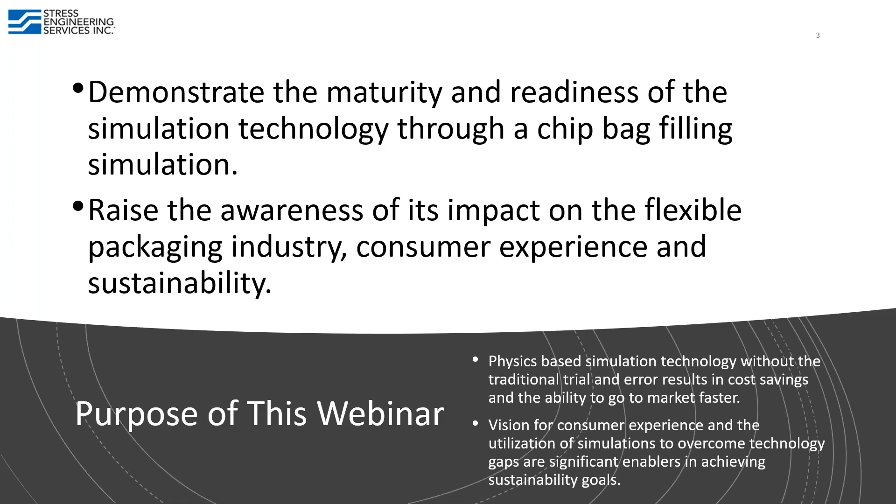Physics-based simulation technology, without the traditional trial and error, results in cost savings and the ability to go to market faster. In addition, vision for consumer experience and utilization of simulation to overcome technology gaps are significant enablers to achieve sustainability goals. Having this technology enabler in the development process is very important so we can achieve the goals we want. This is really the purpose of this webinar.

So what about this - we're talking about shipping less air, and why we even ship air. This is a survey of 14 recognized brand names, and those are chip bags on the screen. You can see the average air content in this bag is 43%. We do indeed ship air around by shipping the chips.

If you think about Pringles, technically it's not potato chips, and as you can see the Pringles are listed there. Even that pretty dense product, even though we can't call it potato chips, has 28% air.

When I read this article and understood what it was all about - it's about consumer satisfaction and things like that - but as an expert working in the packaging industry for 25 years, I was thinking: the shipping truck is half empty. We are indeed shipping air. What a waste of energy, right?

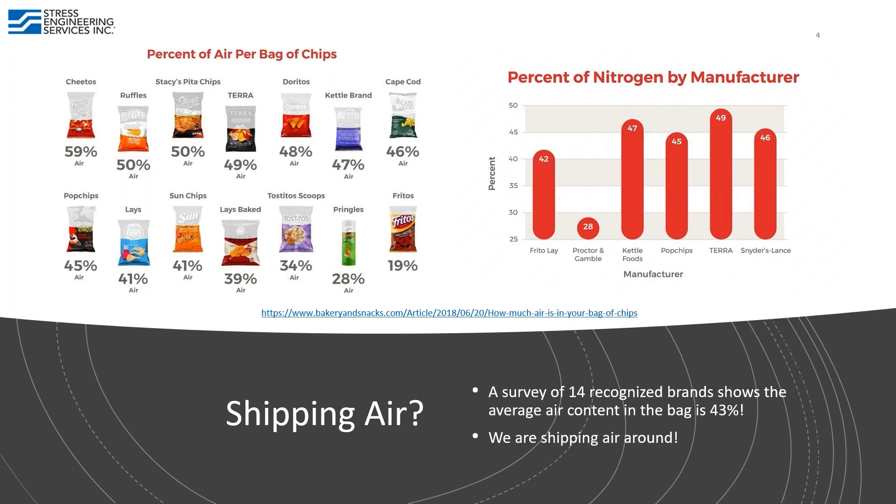Going forward - the article I mentioned on the previous slide is about consumer dissatisfaction and their perception of being cheated. Setting aside the validity of the claim, between 2016 and 2017 300 slack fill cases were filed as litigation. This is over a two-year span, '16 and '17. Slack fill meaning you don't fill the whole bag. This slack fill litigation can be really frustrating for business at that time.

For companies that find themselves on the wrong side of the slack fill litigation, the claim often boils down to: I thought there was more product in the package, even though the label said exactly what I was buying. So it's about consumer perception on this.

This was a big deal in 2016 and '17. As you can see in the picture on the left, social media showed half the bag empty, calling it false advertisement, and very disappointed customers. You don't want that associated with your brand, but it is happening.

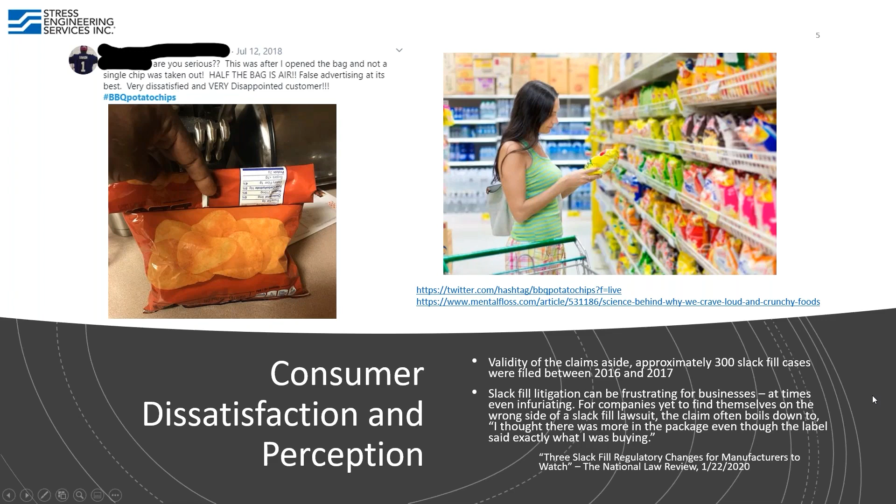From a business point of view, there's a lot of money to be saved. I did a quick research showing just the potato chips segment alone in the U.S. market in 2019 - 17 billion in revenue, just potato chips alone, not even other snacks. Companies typically spend on average 7 to 13%, so around 10% of total sales, on transportation. So that's 1.7 billion on transportation.

So if instead of shipping 50% air, we only ship 40% air, that's a 10% reduction in air content. A 10% reduction of 1.7 billion is $170 million. That's a lot of money to be saved. So by this pure simple calculation, not only for sustainability but for money savings for the brand owner, there's a lot of money to be saved.

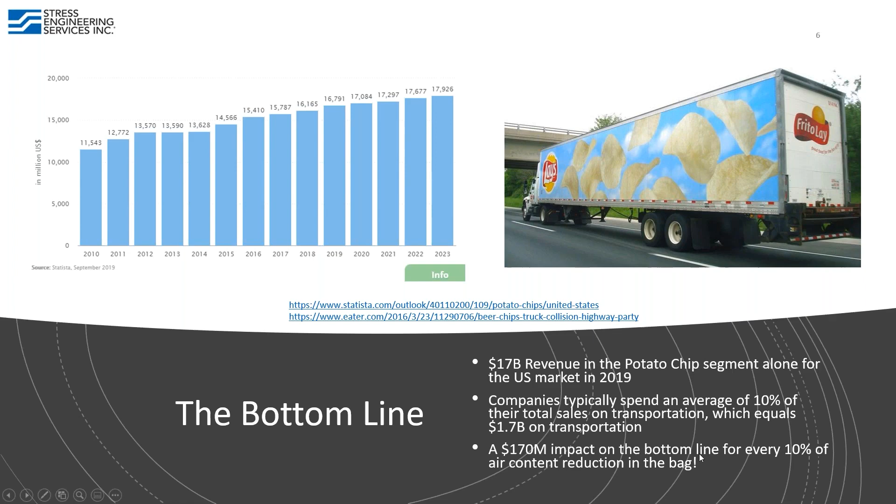Going forward in terms of the sustainability impact on those smaller bags, the additional research I've done includes a rough calculation on CO2 emissions from fuel usage. So if you think about it, every 10% of air content reduction in the bag translates to 170 million dollars in transportation savings.

15.2% of the transportation cost is petroleum, that's 8.9 million gallons of diesel. We're saying $2.90 per gallon, actually even more nowadays, though gasoline is cheaper. So the calculation translates to...

91,000 metric tons of CO2 emission. I was interviewed by Plastics Engineering magazine twice on this article. By the way, this article covered a similar topic I presented at the Plastics Society annual conference in March. They asked, what does 91,000 metric tons of CO2 actually mean? That was the article I did in December last year.

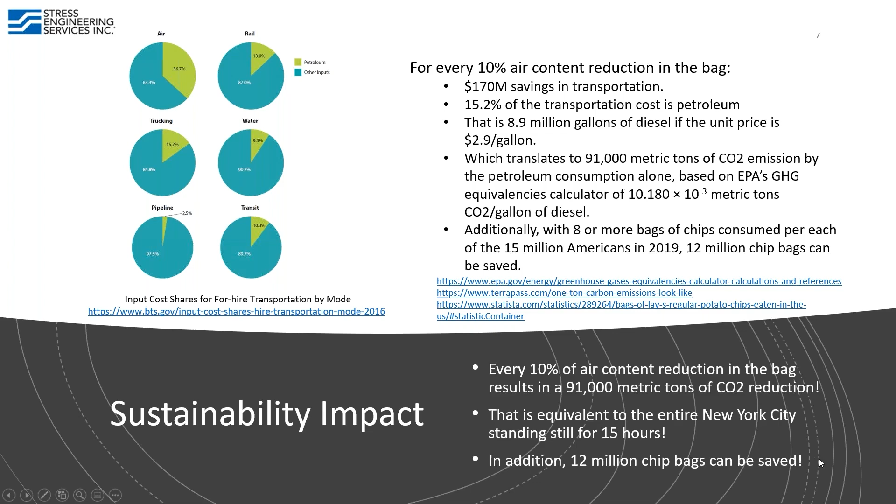This is the sustainability impact just from the 10% savings of the air. As packaging professionals, I presented this topic to the packaging professionals, and everybody in that room knew and said, this is why we need air content, we need that.

We ship air for reasons. For example, we need to flush out the oxygen with an inert gas using nitrogen to preserve the freshness of the chips. The bag needs to be large enough to avoid potential product contamination at the seal bar, because if it's too small, my heat seal can potentially crush my chips and compromise the seal. I also need that air for the pillow effect, to protect my fragile chips during transportation, and to prevent spilling when opening the bags.

Air in the bag is a good thing. As packaging professionals, we all know this is functional slack fill, it's needed. We all know that.

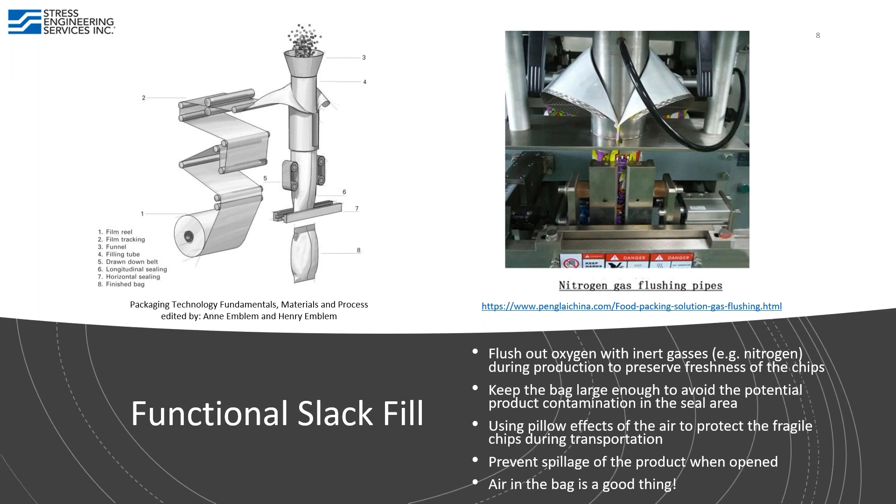However, is there room for less air? There's three things. One is consumer satisfaction, we clearly see the dissatisfaction of consumers. And second, we know the sustainability impact.

So we put more material, we ship a lot of empty bags. Basically on the shipping trucks, they cube out, meaning they're full but not weighed out, because they're full in volume. You see on the highway, those weigh stations prevent trucks from having too much weight. In this case, they're not weighed out because they're cubed out.

So they found that 50% of the trucks are air. This wastes a lot of energy. That's the sustainability part of it. And what we all know is we need that air for the packaging's functional performance.

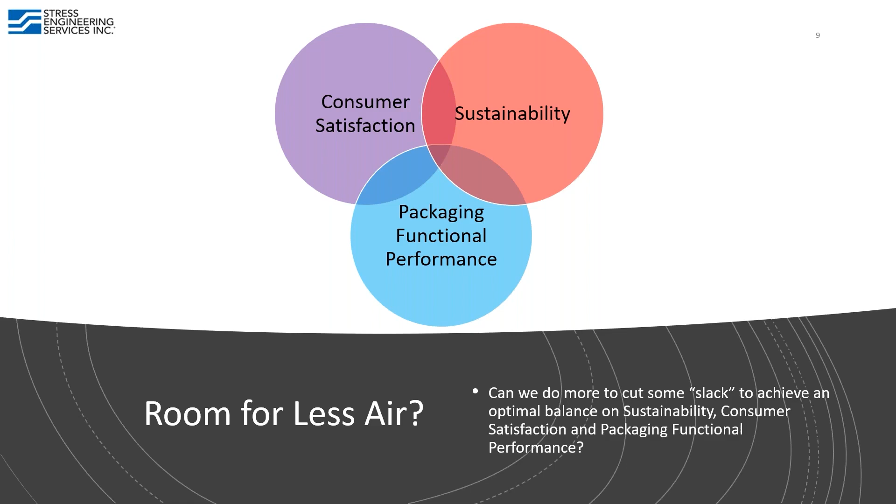Do we have a sweet spot? Can we do more to cut some slack to achieve an optimal balance on those three things: sustainability, consumer satisfaction, and packaging functional performance? Is there room for less air?

So we're talking about snack flexible packages on the market sold by weight. However, the volume of the chips is a function of the chip broken rate, chip size and distribution, bag width, bag film gauge material, and line speed, all that.

So the volume of all that is not a function of weight, it's a function of those other things. To determine the right volume with a given product weight is not trivial, and traditionally it's done by a trial and error process. To my best knowledge today, bag size is still determined just by lab testing.

What I saw with my own eyes, the engineers and lab technicians basically fill the bags into a plastic tube over and over again, and measure the height, then use historical data to determine the height. But because of the lack of accuracy, they have to put a larger safety factor, a larger bag. So due to concern of sealing contamination and issues with the bag being too small, those will be corrected during production, but that is costly over time, and more plastic films are used.

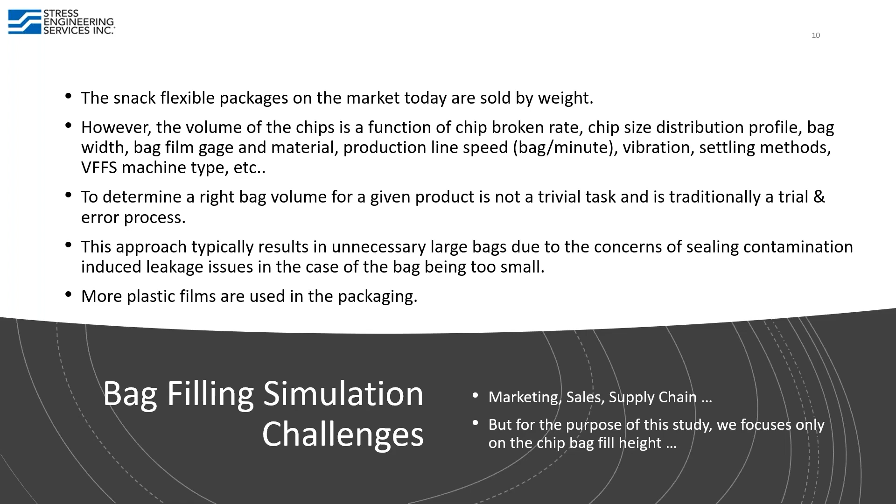So those are the issues and the real challenges. On this specific webinar, we'll focus on the chip bag fill height only, to demonstrate the power of the simulation technology. We'll try to determine the fill height and take the guesswork out of this whole equation by using computer modeling simulation.

This is what we call a digital twin of the actual bag filling process. With the technology itself, we try to demonstrate the digital twin is truly an identical twin, not a fraternal twin. So the technology is mature enough and ready enough.

We become an enabler to fast processing with the fast processing computer hardware nowadays, with expanded modeling simulation capability, and also with big data. Organizations, brand owners, and OEMs have already accumulated tremendous amounts of data, and this data can be used to validate and improve the accuracy of this modeling simulation.

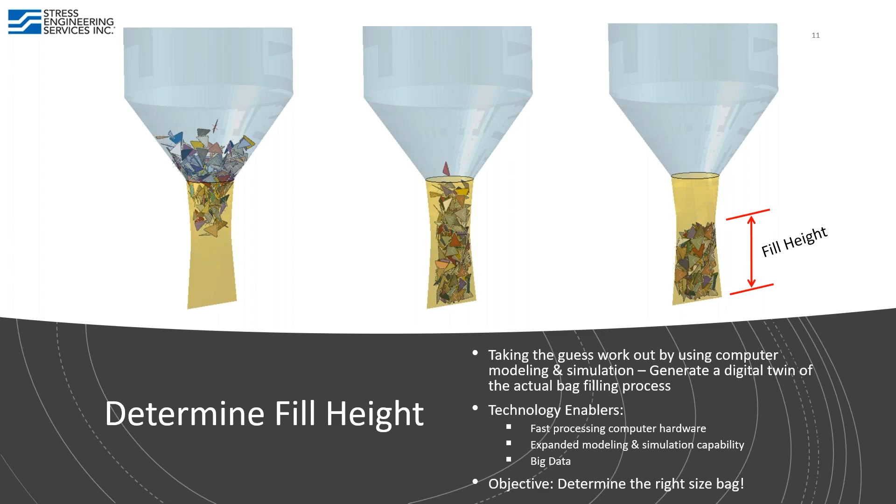So the study itself will try to demonstrate that we can determine the right bag size through modeling and simulation technology. Here's an example: three different cases are presented. The first is a rigid round tube, which engineers typically use, and sometimes they use a bag as well. They use the plastic tube on the left, showing the round tube.

So we simulate this lab process, filling the chips into that round plastic rigid tube, with 100% full chips - those are triangular chips, like pita chips. The second case will also have 100% full chips, but into a flexible bag that we made up, of 22 ounces, 9 inches by 15 inches in height.

The third case will mix in broken chips: 5% half chips, 3% third chips, and 2% sixth chips. An organization typically has this data, because from the manufacturing process, the baking process, and the conveyor lines, they know the distribution.

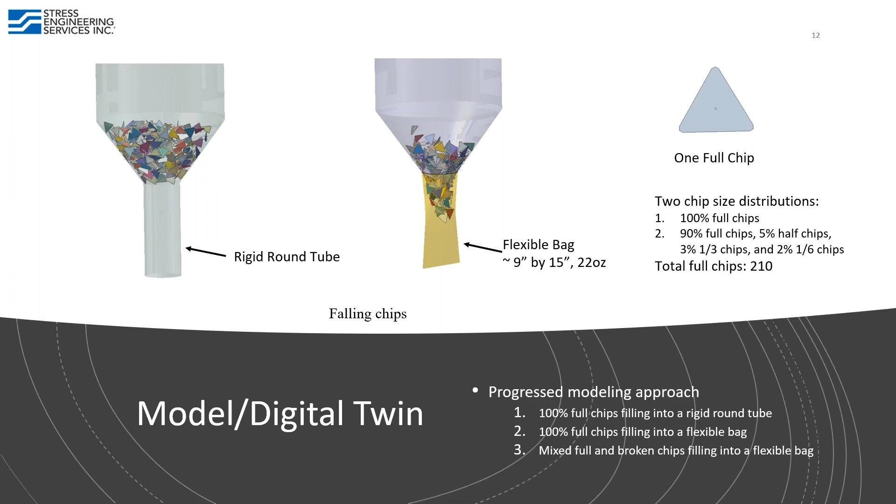Here's the animation showing filling into the plastic tube - this is a round tube, about 210 chips in the whole model. The same chips get randomized before they get into the hopper, and each time we run it the input is randomized. On the left is the animation, and we choose one of the animations. You kind of always have one chip lagging behind - it's interesting because it contacts the corner of the hopper.

On the right is showing the result - we did this 100 times differently, randomized. You can sort of see the normal distribution, with the average height at 4.19. This happens 21 to 22 times, and the highest gets to 4.85, about 3 times. We only ran 100 times, so this is just the distribution of the height. This is again 100% full chips with a round plastic tube, so the height is pretty low.

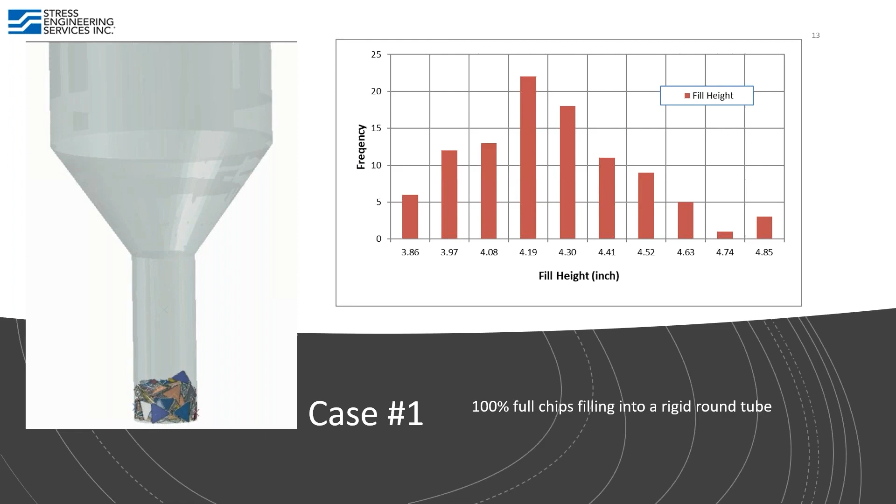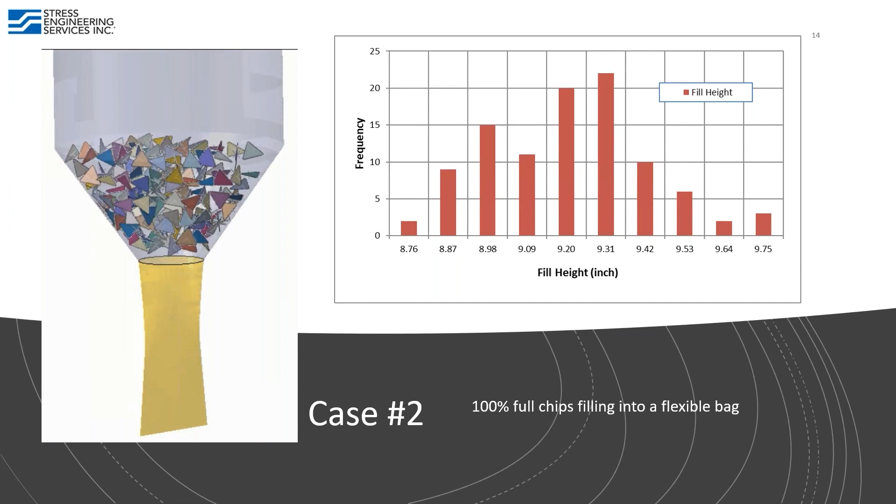Progressing to the next case, we still have 100% full chips, but now into the flexible bag. You can see 100 randomized filling runs, and the average is around 9.2 to 9.3. Your highest fill height is 9.75, and your lowest, which happens probably only twice out of 100 times, is 8.76.

The important thing here is that brand owners and OEMs are really interested in the highest fill height, because that will determine the bag size - at that point the seal bar is going to close, and they want to make sure the seal bar will not clamp onto the chip. So that 9.75 figure is very important to the brand owners in terms of determining the bag size.

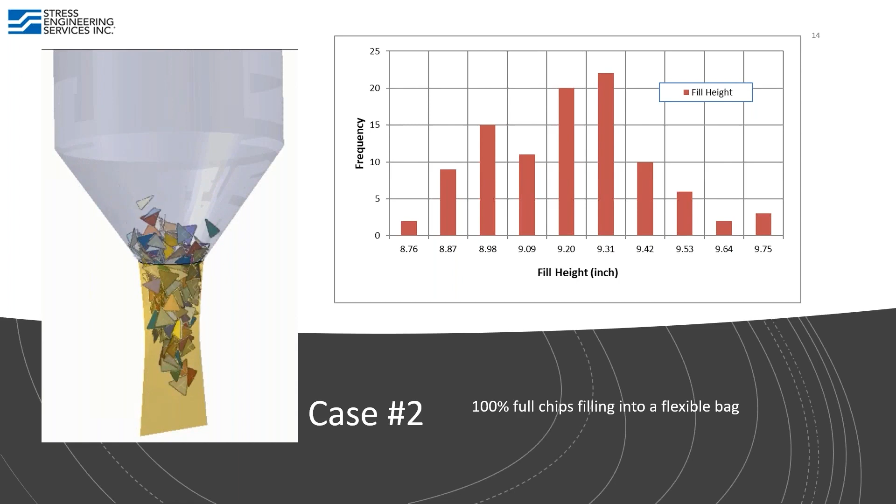Progress to case number 3. This time we added more complication. The bag is still the same, the hopper's still the same, but our chips are mixed, which is more close to reality: a mix of full and broken chips. In real life, there are also pitas that are curled, which we're not modeling here.

Notice that the height actually - in this case we were hoping the height is going to be reduced because the weight is the same. If you look at all three cases, the label has to satisfy the label claim for the brand owner, so the weight is the same. With broken chips you would expect lower fill height, but in this case my height actually increased. This is a surprise, but I think we may need to run more times.

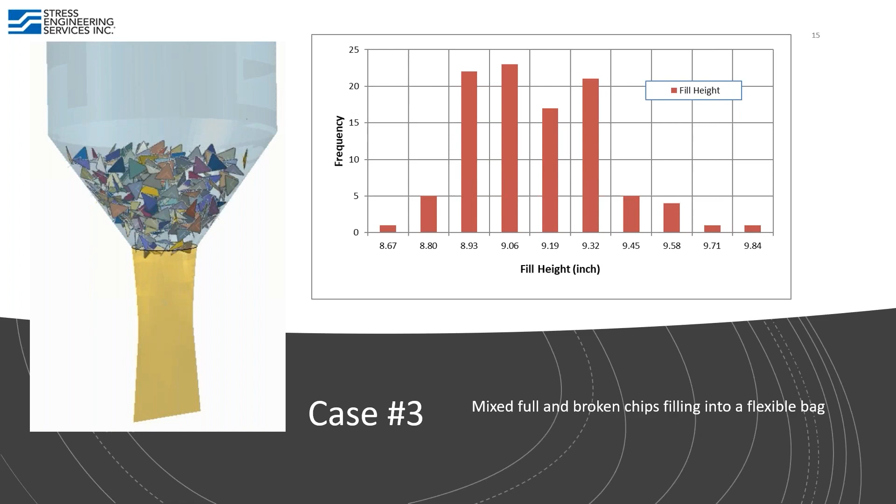This will only run 100 times, so we may need to run more times to really see the true distribution of it. But you see also in the nominal case, they are more concentrated in the middle.

The other thing we noticed is that in one case there's one chip falling behind. It takes longer time because of that transition - the hopper transition to the bag is a sharp transition, and I have a bag bouncing in the back. That's very important in the manufacturing process.

It's all about cycle time in the manufacturing process. The manufacturer needs to pump more product in the same time, so the cycle time needs to be fast. In this case, once in a while, at least for this case, 1 out of 100 times you will have a bag with a chip lagging behind.

You will have problems sealing it and probably end up with a leak in the seal bar. The chip bag filling process runs so fast that 1 out of 100 means every minute we will have a problem. That's not good. This is showing how engineers can visualize the whole process and how everything works.

So they can design - not only for the bag size, but also how they design their hopper - so that the transition is smoother. It's very important, and it gives engineers a visual of the whole process.

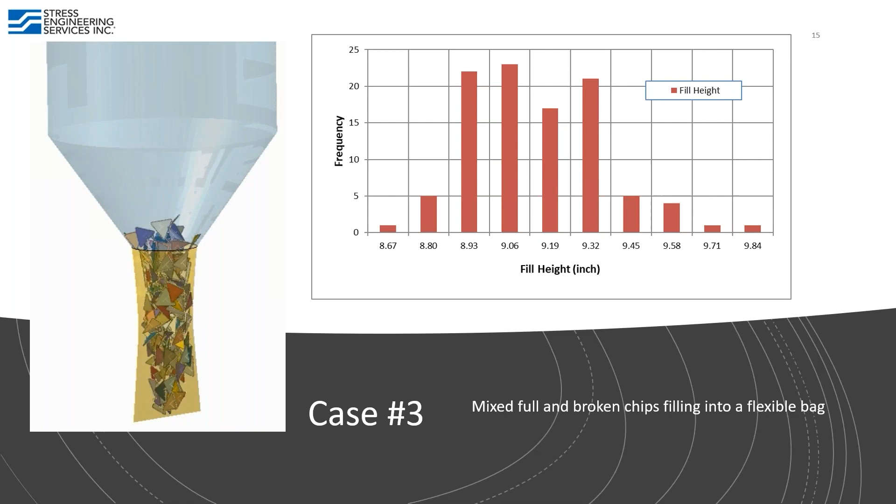But in real life, this is not transparent. The bag has all the label, color, marketing information, and health information on it. The hopper is not transparent either - you're not able to see anything. All you see at the end is a leaker - a bad bag - and this happens every minute, which is really bad.

So those three cases were presented, and I put this in the summary table. You can see the average for case one is only 4.25 in height because it's a plastic tube. Remember, they're all the same weight.

For case two, with full chips, I got an average that's higher, 9.2. The third case, with some broken chips, is lower, which makes sense. The only thing that didn't make sense is I would expect the maximum to also be reduced compared to case two, but it's a little bigger.

So that needs a little additional investigation. Either we need to run more, or there's some physics behind that for some reason that needs to be there, and we need to understand that to change the process and eliminate those kinds of outliers.

This runs - all three cases for each simulation take about 10 minutes using 32 parallel processing CPUs on our high performance computer cluster.

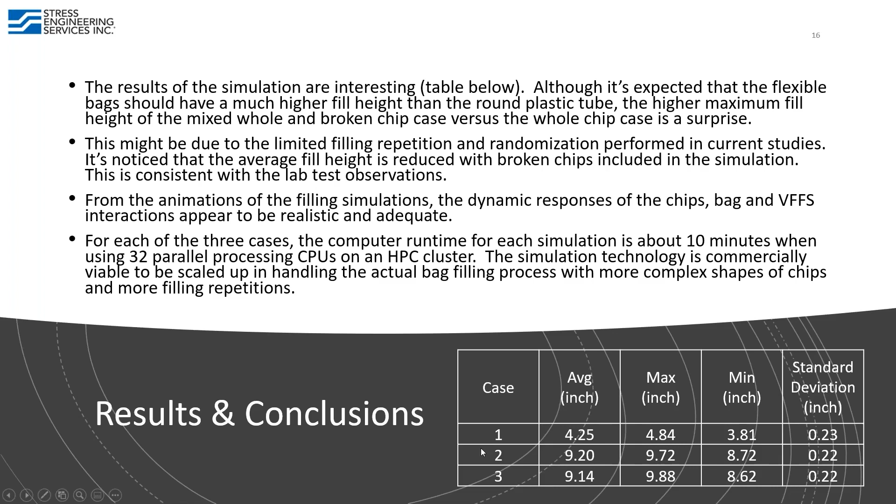So it's not very high by today's standard—there's a lot faster cloud computing power out there. The computer time definitely can be shortened, but this just demonstrates whether the computer resources are powerful enough to handle this process. I'll go further into this.

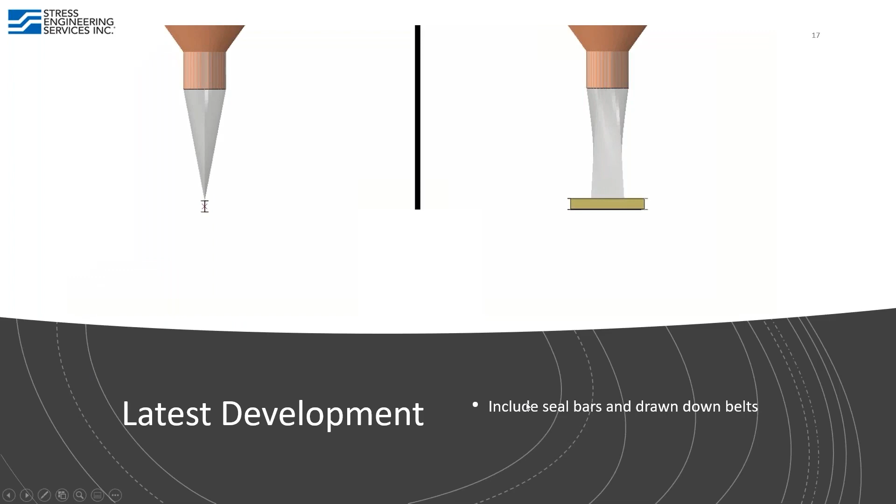That's what happened back in December, and later we had further development on that. We included the seal bars and the drawdown belt so we can simulate the bag coming down. You can see it filling and the seal bar opening and closing—the whole process. On the left image you look directly into the seal bar from the side, and the right image is a 45-degree angle. This is a more realistic situation with the mixing of the chips, along with the seal bar and drawdown belt model. This is the latest development.

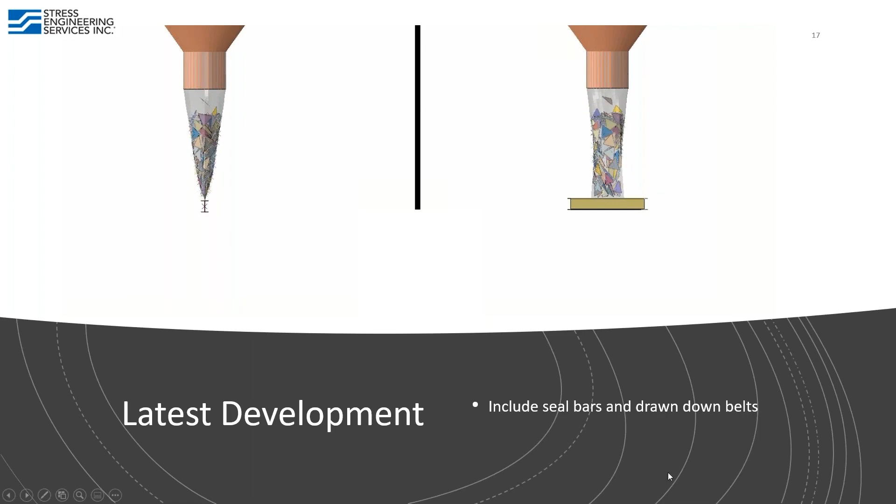For additional development, regarding the input from brand owners I've worked with—some are very advanced and already have input information like the broken chip percentage as a normal distribution. But for new products, that information might not be available. So for future development of this work, we can use IIoT, artificial intelligence, and machine learning to gather the information.

As you can see on the left, during the pre-filling process we have a camera looking at the chips—maybe two cameras, one from the top and one from the side—and they can gather information on broken chips and chip shape. This feeds back into the simulation. That's the pre-filling process.

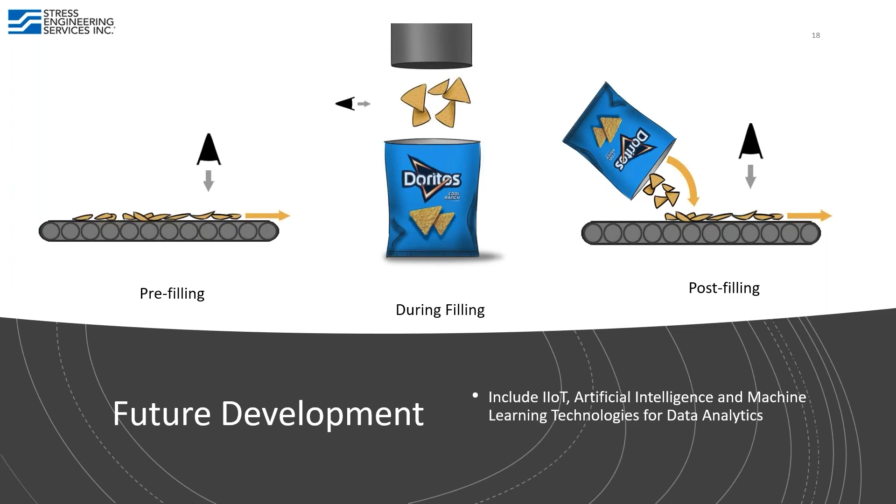And also post-filling—I was asked, because at the end of the day the consumer gets the bag, opens it, and during transportation some chips will be broken. So in terms of consumer satisfaction, are most of them full chips or are some broken? If we can study the post-filling process and the distribution process, we can look at the broken chips. This really tries to use AI and machine learning to give a feedback loop to the baking process.

That's the next one—these are just some pictures showing future development, how we can leverage artificial intelligence and machine learning in parallel with digital modeling, which we just showed in those three cases of modeling simulation. How can those two work together to increase the efficiency of the production process—that's in the future. So we have line data, surrogate models, digital models, AI and machine learning, all working together for this development.

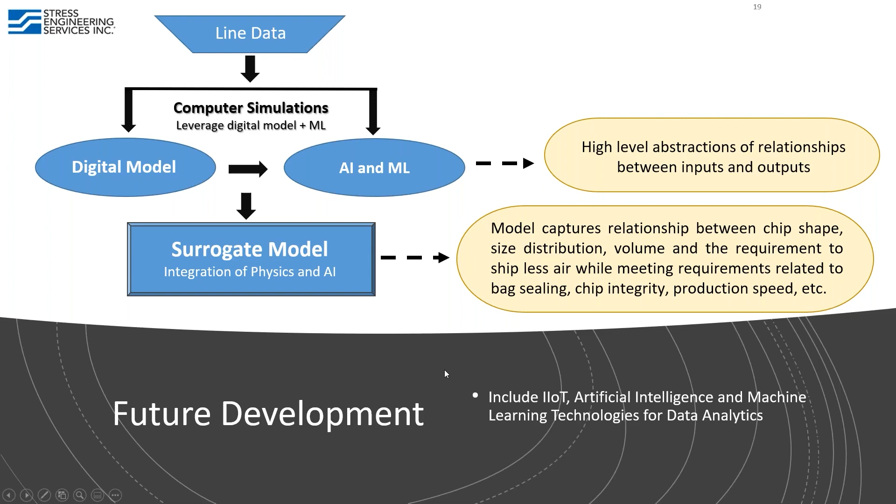So, where we are—we really need collaboration from the brand owners and OEMs to validate and advance this digital model. We've already received interest from some brand owners and OEMs, so those are in process. Validation is in process, and future development will include different shapes of chips.

We mentioned the curl, the pita chips, and some other snacks. This also extends to gummies and candies, and there's interest in that as well. For gummies especially, the shape is well defined, but the difficulty is the coefficient of friction, which causes some issues. There's also interest in powders, coffee grounds, and of course liquids.

So in terms of how we determine the fill height and how we can model the process—the modeling process's end goal is not only the bag size, but also the quality of the seal, and also improving the filling process itself.

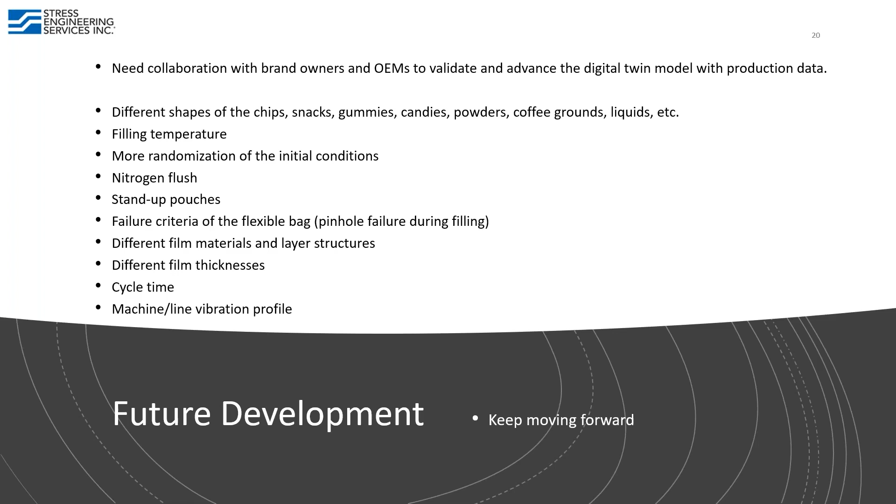So I want to, because we only have 15 minutes left, drive to the conclusions - what are the key takeaways from this webinar?

What we're trying to say is simulation technology is ready, but it's also rapidly evolving, and its application and impact go far beyond bag filling and shelf life.

One example I have - I got this probably 2 years ago when I presented at the ISTA conference, an international conference. This information is probably 2-3 years old. Quantum computing is 100 million times faster - imagine 100 million times faster than what we have. And a working quantum computer is less than 10 years away. That's from Microsoft. Actually, lately I learned Google already has one.

Think about 100 million times faster, and we're talking about a 10 minute running time - this could become milliseconds. We could run this in 10 years. So with simulation technology ready, we need to keep that in mind, and the industry is really moving towards a full virtual packaging development system. Brand owners and OEMs need to embrace the technology to stay ahead. At the end of the day it's about speed to market, value to the consumers, and sustainability for the whole wide world, and we need that message as well.